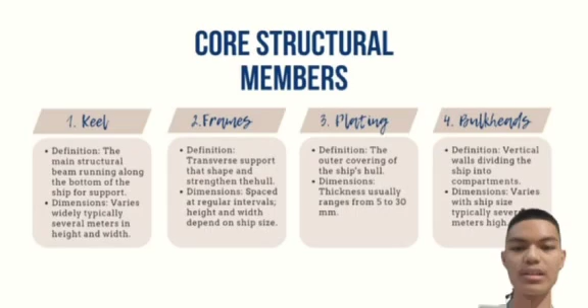This report explores the essential structural materials used in shipbuilding, focusing on their roles in ensuring a vessel's strength, stability, and longevity. It covers key components like the keel, hull plating, and internal supports, highlighting their material properties and dimensions.

1. The keel is the main structural beam running along the bottom of the ship, crucial for stability and strength. Its dimensions typically range from 1 to 2 meters wide and 0.5 to 1 meter high, depending on the size and type of the vessel.

2. Frames are vertical supports inside the hull, spaced regularly to keep the ship's shape and strength. They are usually spaced about 0.5 to 1 meter apart.

3. Plating is the ship's outer shell, enhancing hull strength. Thickness usually ranges from 5 to 30 mm.

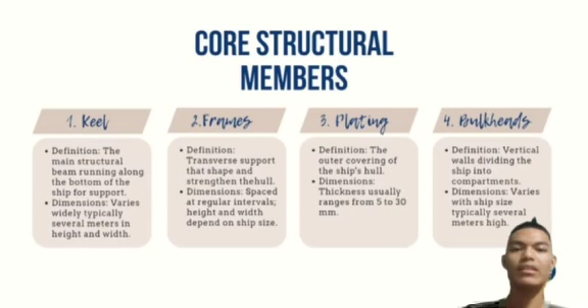4. Bulkheads are vertical partitions inside the ship that separate compartments and add structural strength. Thickness is generally 10 to 20 cm.

Typically, the width of stringers ranges from 10 to 50 cm. The height can vary depending on the specific design requirements of the vessel.

7. Stem and stern posts. These are vertical structural members at the front stem and the rear stern posts of a ship, providing shape and support. Their dimensions vary based on the ship size.

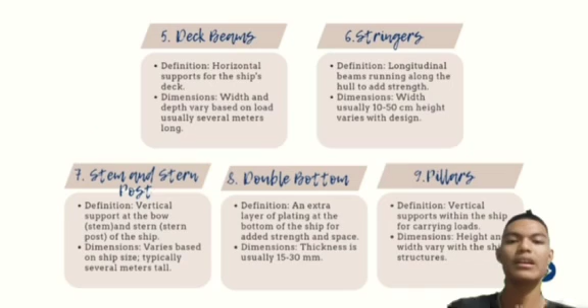8. Double bottom. This is a reinforced layer of plating at the hull's bottom for extra strength and protection. The thickness of the double bottom plating usually ranges from 15 to 30 mm.

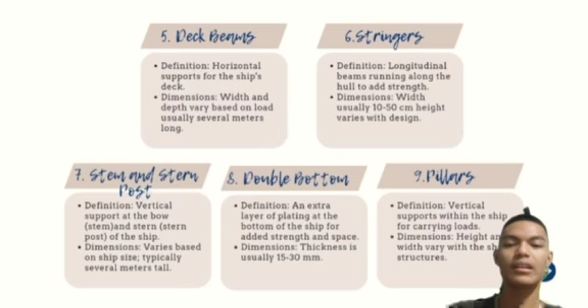9. Pillars. These are vertical supports that carry loads from the ship's deck down to the hull. Their dimensions vary with ship design but typically have a diameter of about 20 to 50 cm.

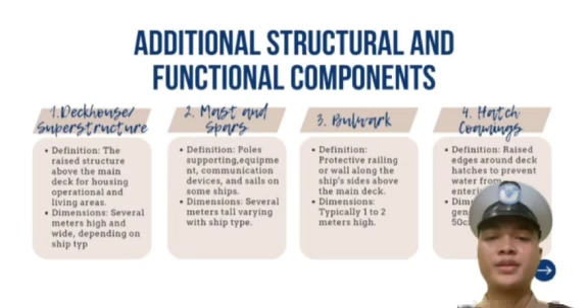Deckhouse provides accommodation for the crew, including living spaces like cabins, mess rooms, bathrooms, and possibly the galley or the officers' quarters. Spars are horizontal poles that help support sails or other equipment attached to the mast.

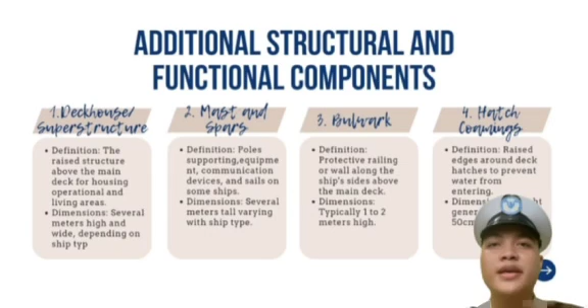Its dimension is 10 to 30 meters long. Bulwark acts as a protective wall to prevent water from splashing over the deck. Its dimension is 1 to 2 meters high.

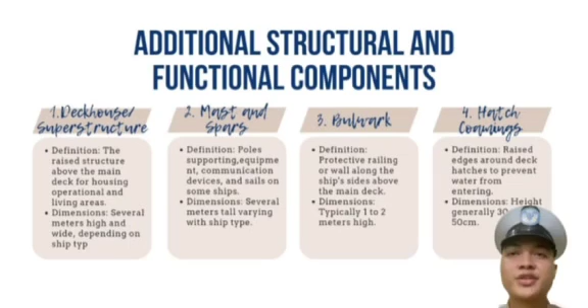4. Hatch coamings. Raised edge around the deck hatches to prevent water from entering. Dimensions: height usually ranges from 30 to 50 cm.

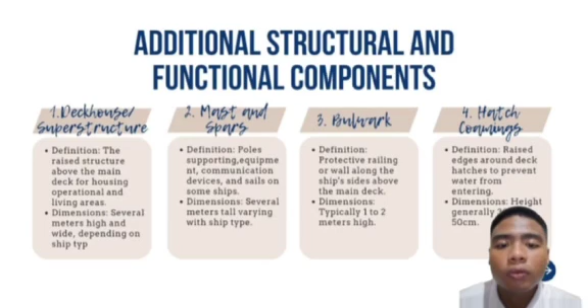5. Skeg. An extension at the stern that supports the rudder and enhances directional stability. Dimension varies with ship size, typically extending several meters from the stern.

6. Bossing. Reinforcement around the propeller shaft to reduce turbulence and improve propulsion efficiency. Dimension extends several meters from the hull.

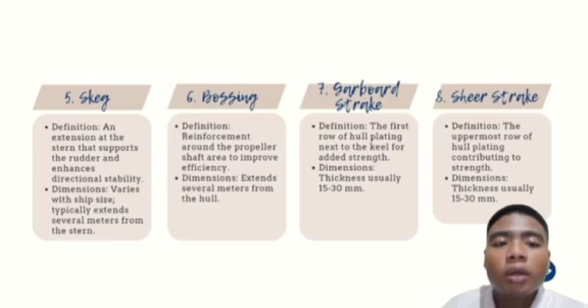7. Garboard strake. This is the first row of hull plating adjacent to the keel, providing additional strength to the boat structure. It typically has a thickness of 15 to 30 mm.

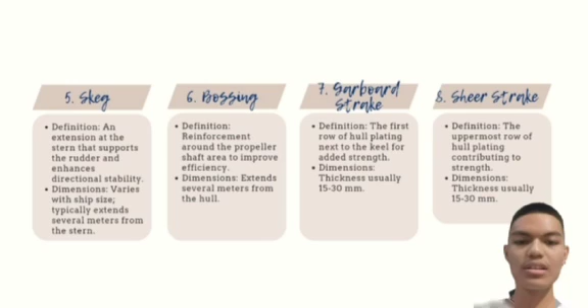8. Sheer strake. This is the topmost row of hull plating, also designed to enhance the hull's strength. Its thickness is generally 15 to 30 mm as well.

9. Rudder. A movable component at the stern used for steering the ship, usually several meters in height and width, with a thickness of 15 to 30 mm.

10. Bilge keel. A stabilizing feature along the hull to reduce rolling, typically 30 to 50 cm wide and extending several meters.

11. Transom. The flat or curved panel at the ship's rear that supports the rudder and propeller, generally 20 to 30 mm thick with variable width.

12. Tank top. The structural floor at the bottom of cargo holds, providing strength and protection, with a typical thickness of 15 to 30 mm.

13. Longitudinals. Long beams running parallel to the keel to provide additional support.

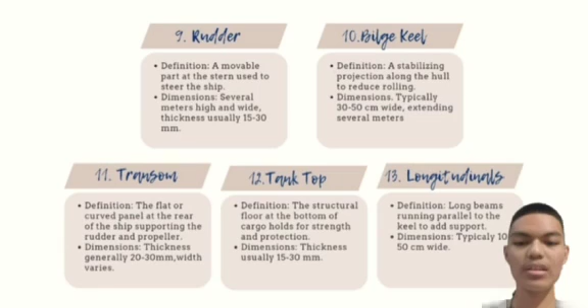Dimensions of ships: LOA, or length overall. The length of the ship affects its capacity, stability, and speed. Longer ships, like modern container vessels, can exceed 400 meters, about 1,300 feet, and are designed to maximize cargo space and reduce transport costs.

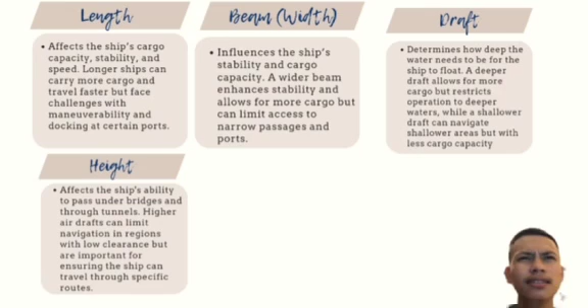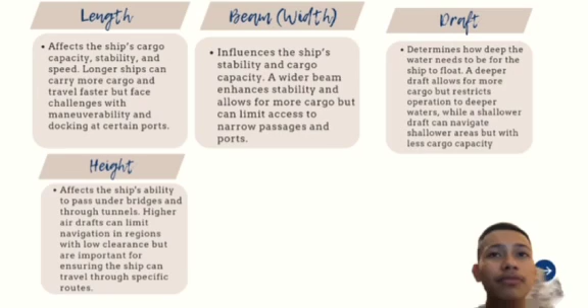However, longer vessels can face challenges in maneuverability and docking, and their size can limit access to certain ports. Beam: the beam is critical for stability and cargo capacity. A wider beam increases the ship's stability, allowing it to carry more cargo or withstand rough seas better.

For example, a large container ship with a beam of around 60 meters, about 200 feet, is more stable and can carry more containers compared to a narrower vessel. However, a wide beam can also impact the ship's ability to pass through narrow seas or canals.

Draft, or depth below waterline. The draft determines the minimum depth of water needed for a ship to float. Ships with a deep draft, such as large oil tankers, can carry more cargo but are restricted to deeper waters. Conversely, ships with a shallow draft can operate in shallower areas, making them suitable for rivers and coastal regions, but often with reduced cargo capacity.

Height, or air draft. The height of a ship from the waterline to the top of the superstructure impacts its ability to pass under bridges and through tunnels. For instance, the design of cruise ships often takes air draft into account to ensure they can navigate under bridges in popular cruising regions.